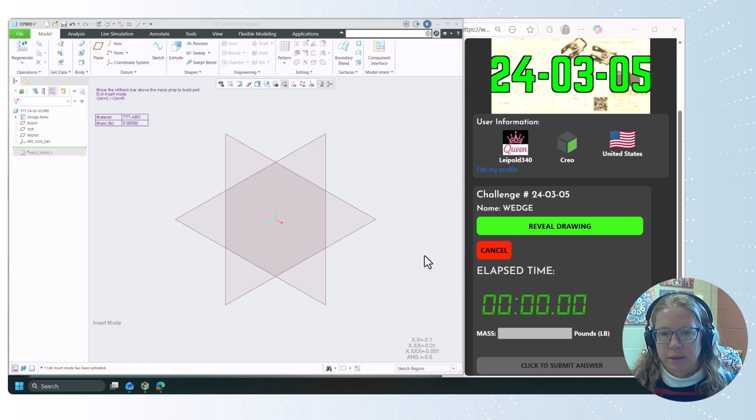All right, 240305. Let's check out this inch drawing. About time. All right, we are in ABS. We're doing this wedge. We got a lot of stuff happening in that front view, so let's jump into it.

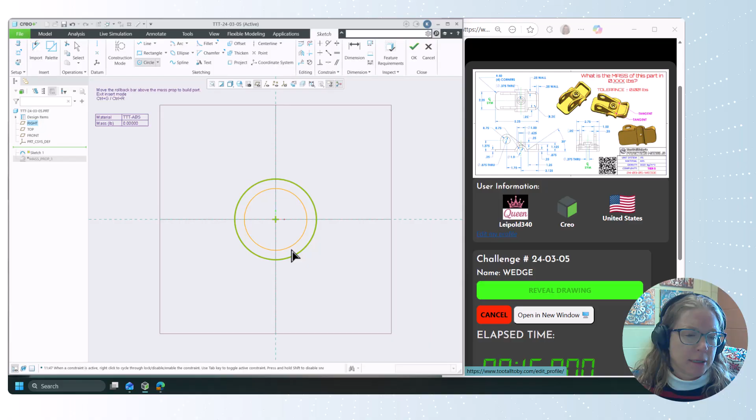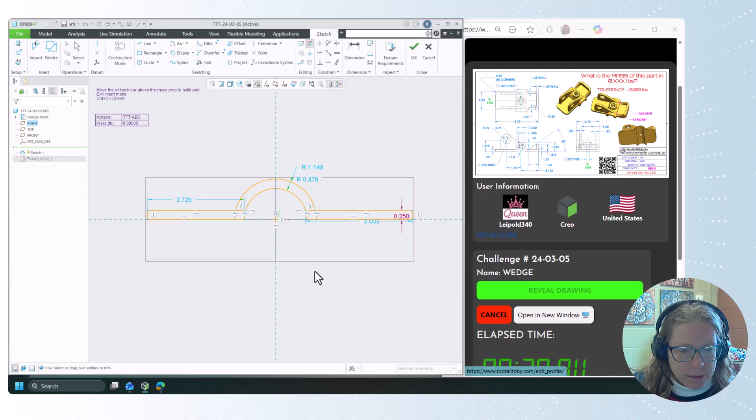I like to start with circles. I like circles better than I like arcs. Nothing personal arcs, it's just circles are a little friendlier. So I'm going to get some stuff on here. And let's see here. This is going to be 0.25 inches. And this overall width here. Oop. I don't want to spend too much time on these dimensions because I am going to trim some of this stuff off. I'm going to use sketch regions for sure. But we'll leave some of the pieces of information there.

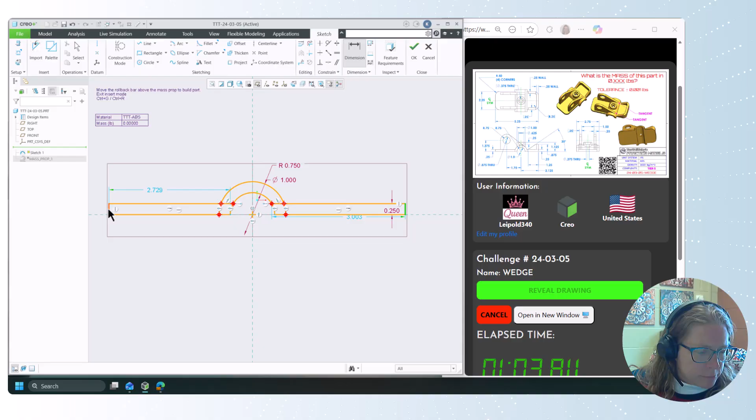This radius is, actually is a diameter. So we're going to click there, diameter of 1. But this is a radius of 0.75. Yep. And we're going to throw a couple of dimensions on here. We're going to get the overall width, 5 1/4. But it's going to go on the right-hand side for 2 1/8. So we go here. All right, that's better. Okay.

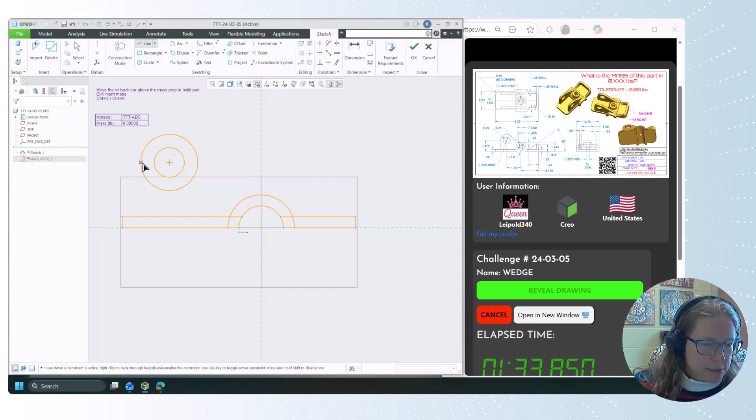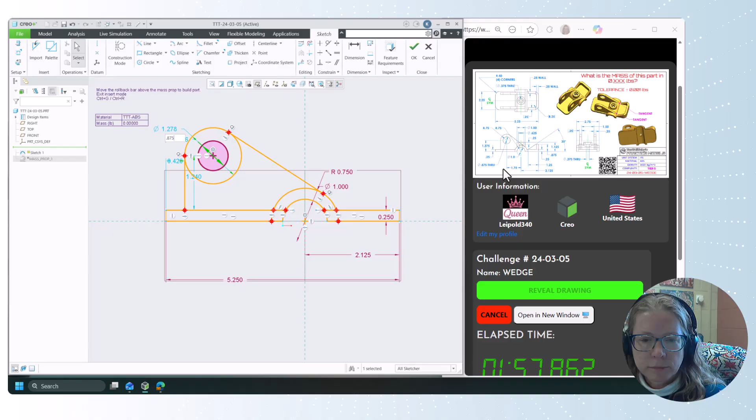We're going to add a couple of geometry pieces up here, a couple of lines off that one. Actually, this is a perfect opportunity for a tangent line. Okay. So this inner circle diameter is 0.875. And the outer radius is 0.75. We need a dimension, center to the bottom datum, 1.375. And its location is 1 3/4 from that center datum.

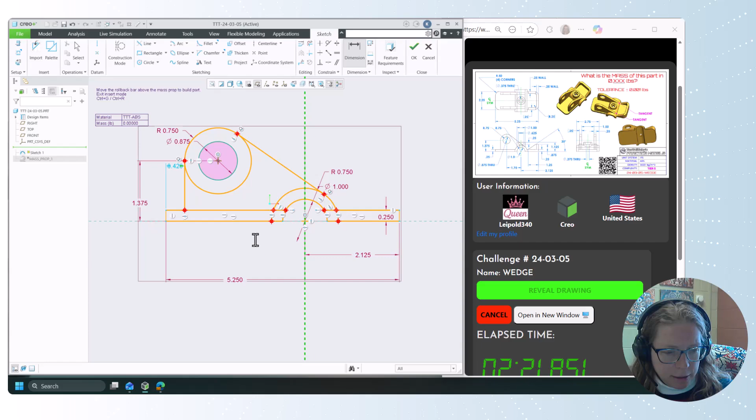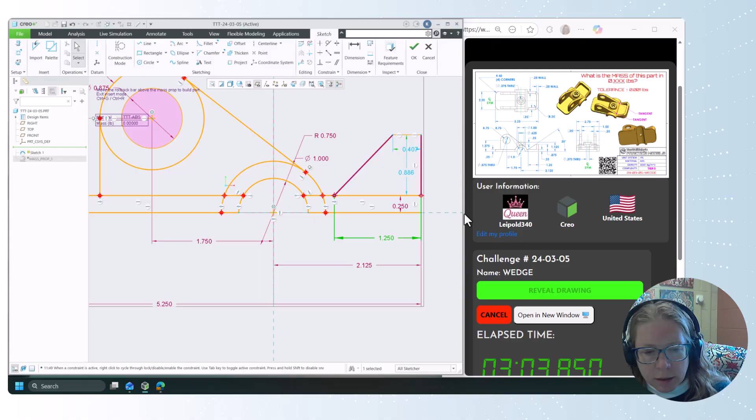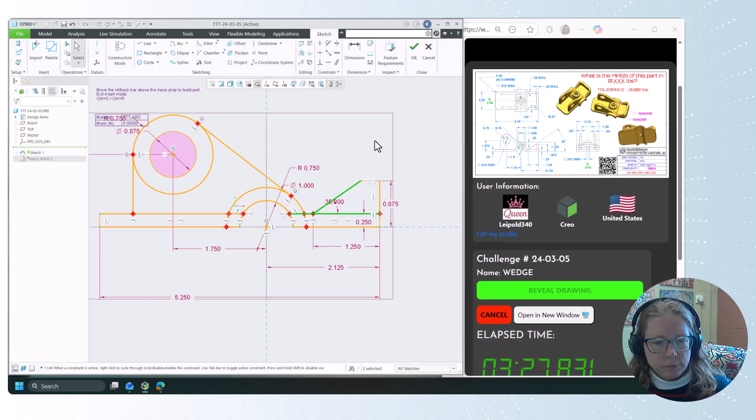All right, so the left side looks pretty good. Right side, we're going to add on just a little bit more. We're going to go up, over. All right, so let's see. Here to here, we're going to dimension that. That's an interesting place to put that. That's all right. And then our overall height is 0.875. And here to here is an angle of 35. All right. I think we can start working with this.

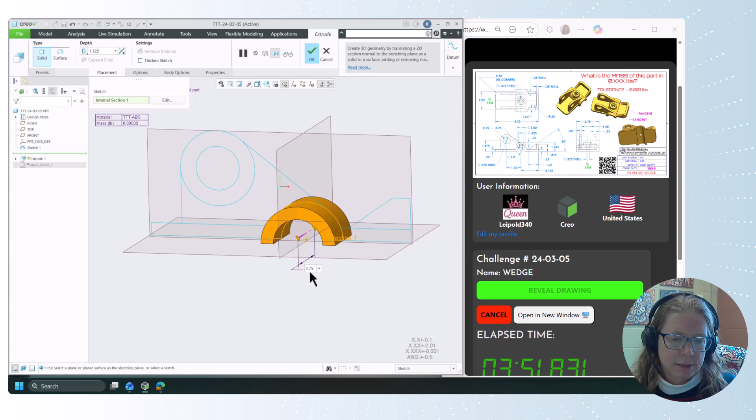All right. So I do have it set to sketch regions. I'm going to start with this shape and extrude that. We're going to make that symmetric. And the overall width there is in the right view, 2.75. We're going to take this geometry and this geometry, extrude that. Again, oops. Sometimes it's easy to pick there. Sometimes it's easier grabbing the dashboard. 2 1/4. Make sure that looks right. Looks good.

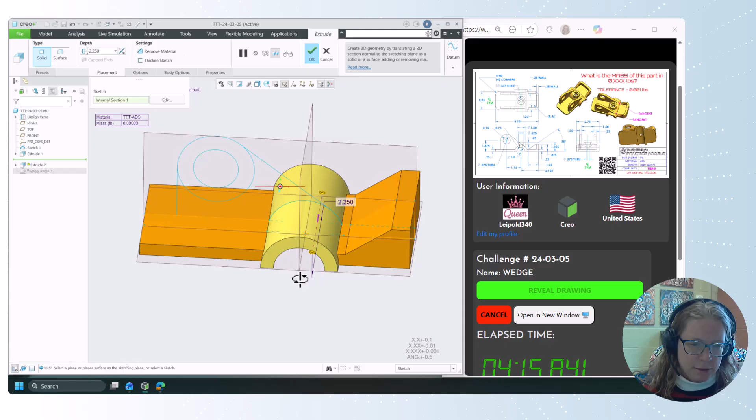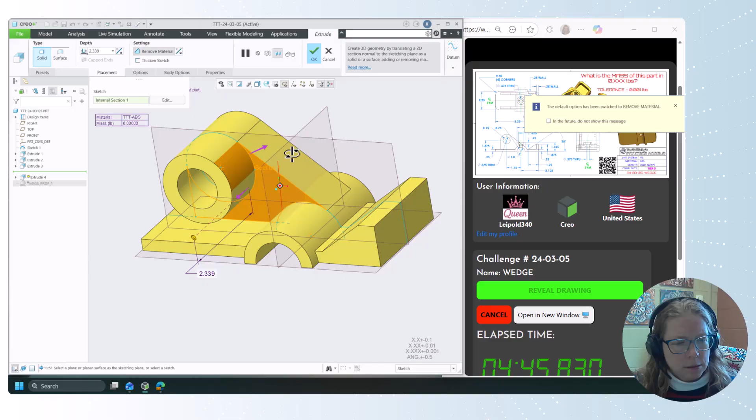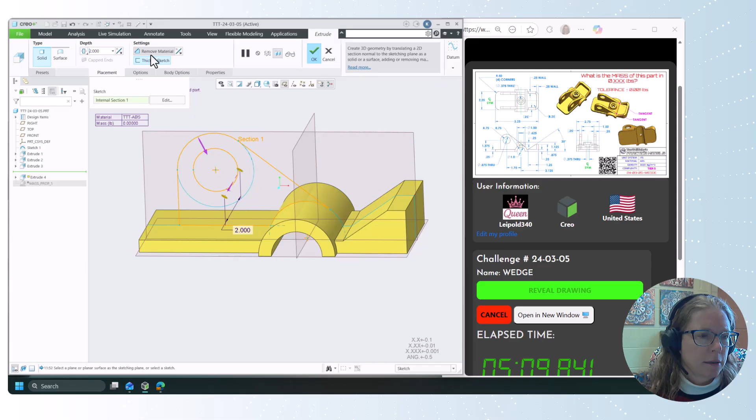Take these two and extrude them. Again, symmetric. And we'll set the width there to be 2. So that from the right side view is 1 1/2 on the inside, plus 1/4, plus 1/4. But then we'll take the same... Yeah, I was afraid that was going to happen. Let's hit cancel. Hold down Control. All right, sketch region. A little harder to see here. There we go. Symmetric. Width of 2. Nope, width of 1.5. Yeah. All right. So that looks really good from that side. We're going to hide that sketch now.

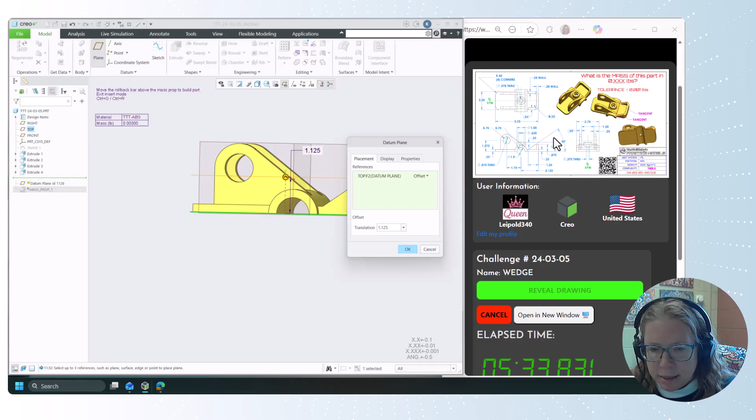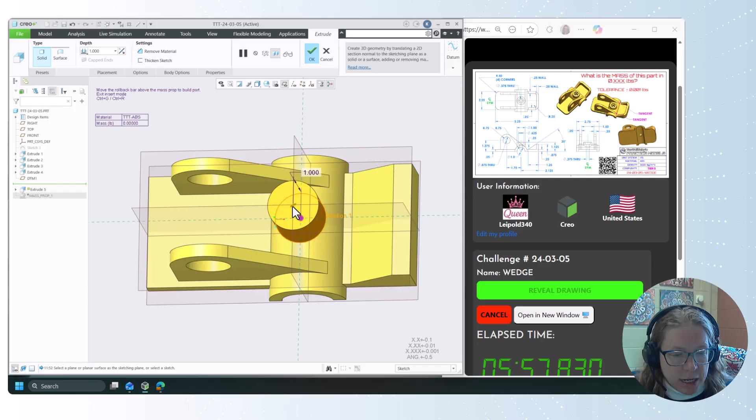Done with that one. And we're going to start another sketch, but we're going to make this offset and we'll kind of extrude down from there. So that value is 1 1/8 right here. It's the height of that raised geometry. So we're going to start our sketch there and extrude a circle with a diameter 1. I'll add a hole to that when we're done. Okay. I'm going to hold down Shift as I drag, and I'm going to select that top surface. So holding down Shift gets you up to reference.

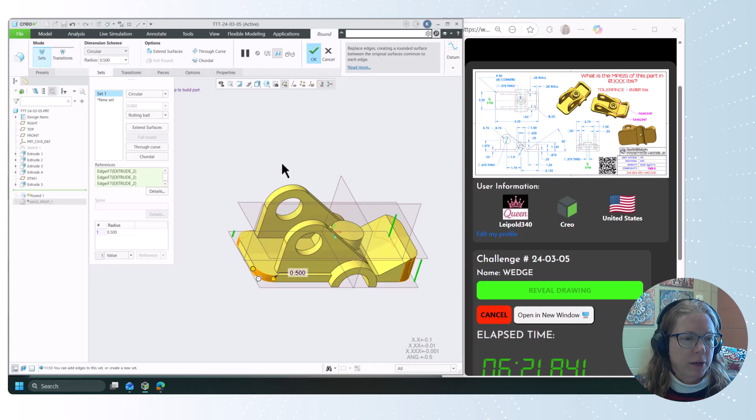Okay. And let's add some rounds. So radius of 0.5, 1, 2, 3. Awfully tricky to grab that one. There we go. Okay. Holding down Control to get all those rounds at the same time. Okay. And now I'm going to do a sketch. Actually, you know what? We can do this right as an extrude. So we're going to extrude from that top datum plane we created before.

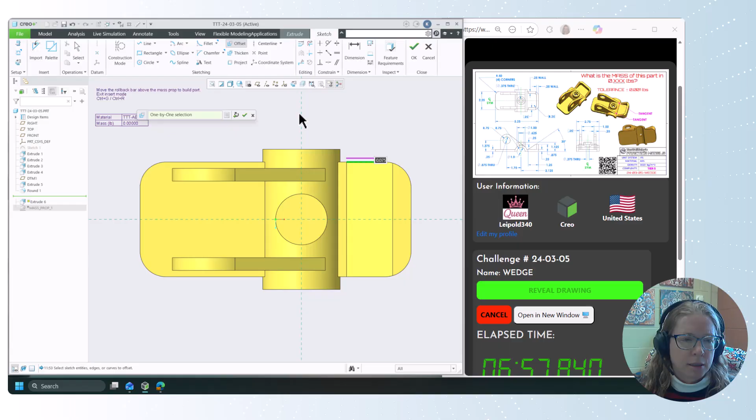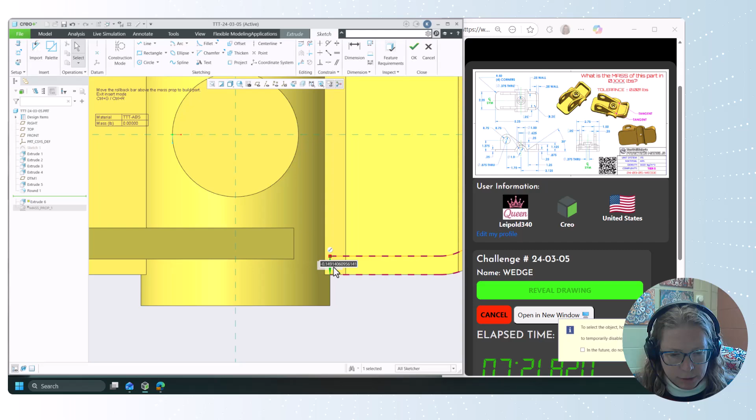I will be honest, I have tried this, and trying to do offset on these edges is kind of tricky. It doesn't do the loop, the surface loop, the way you kind of expect it to. So instead, if you get the bottom line and do a surface loop, that works much better. Okay, so I want it to come in. It's going to come in 0.25. Come on. All right, and then we will add the line.

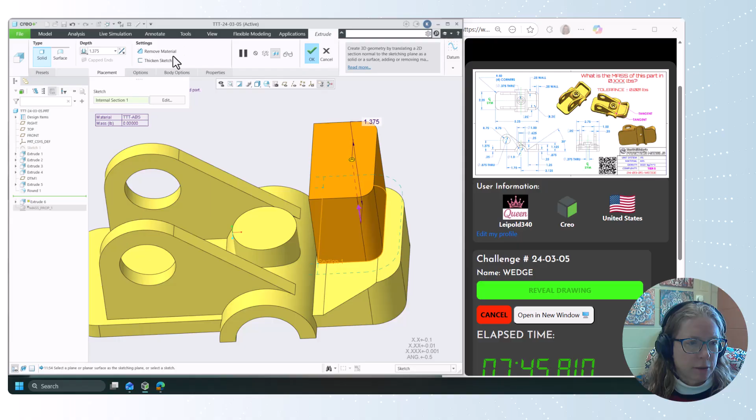And because this is an extrude, not a sketch region, clean that up with the corner tool. And again, we're going to use Shift, but we're going to remove material. So we're going to drag this way, hold down Shift, and select the surface, and remove material. Last thing to do is drop a coaxial hole on here. And again, hold down Control to get multiple surfaces. We'll use a drilled hole with a counterbore. Diameter is 0.375. Through to next. Counterbore diameter is 0.625. And the depth of the counterbore is 0.25. And those are shown in the front view.

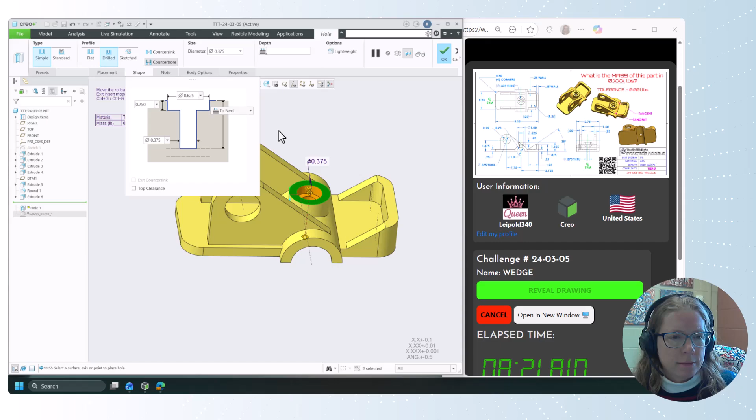All right, so let's turn off some axes and rotate around. This is looking pretty good. Let's see how we did. And we are going to type in a mass of 0.204. Boom! All right, I like that part.

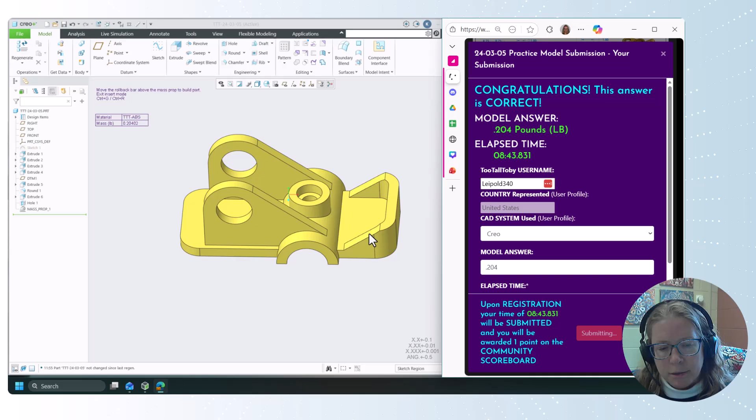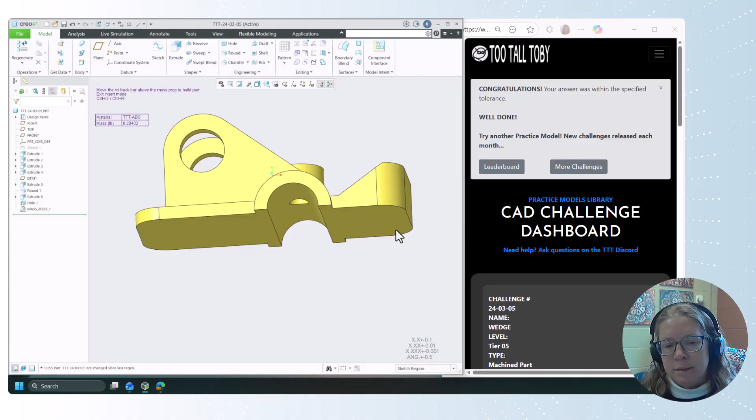I'm going to be honest, the partial loop, the offset loop on the right-hand side, from the top, I struggled with that the first time I tried this. Couldn't hold down Control and select edges, couldn't use the tangent loop, the selected chain, it was just really struggling to get these edges here. Maybe if I had done a projection of the surfaces on the outside and then done an offset of those surfaces, I might have had better luck. But then I recalled that instead of projecting the top edges, I could project the bottom edges, and that was kind of the key to making it smoother. So that was my lesson learned from this wedge.